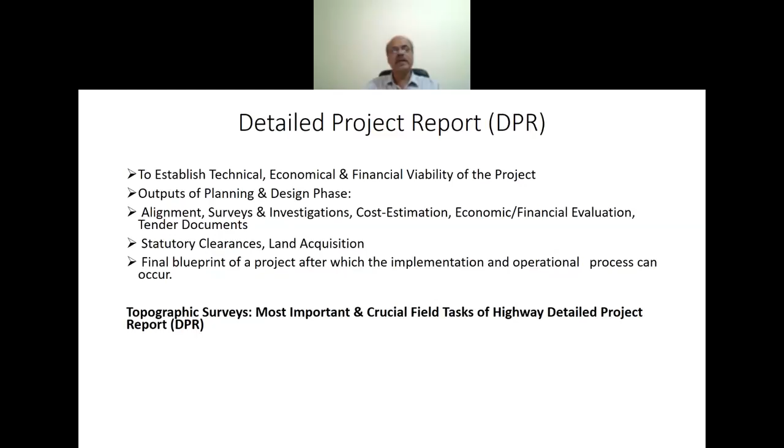So it is the initiation. The detailed project is the detailed planning and design process. Correct.

So if we start with the parts of the survey, there's the reconnaissance survey. Hope everybody knows reconnaissance survey. Can anybody tell me what is reconnaissance survey? Already opened the slide. So reconnaissance survey is the first hand established means - going to the site, visiting the site, and working out based on visual observation and based on the study of maps.

Can I ask people how many have already been involved in the detailed project report? Anybody, whether everybody has experience, so then accordingly I will outline my presentation. Everybody has experience in topographical survey? Hello? Please be interactive.

So can you tell, has anybody done the reconnaissance survey as a part of any road project we were involved in? Yes sir, I did.

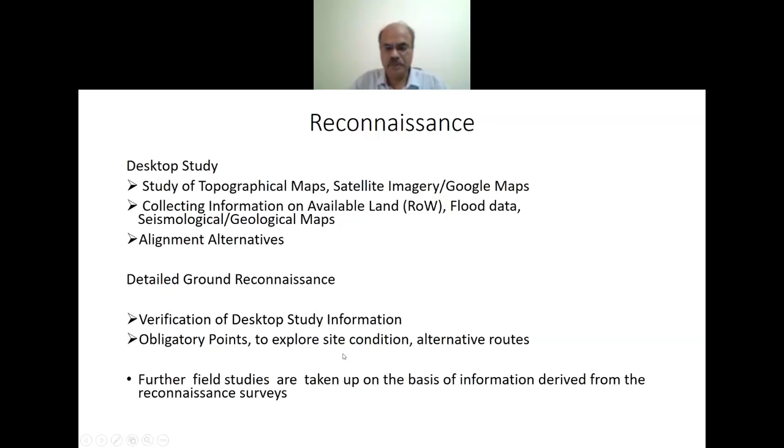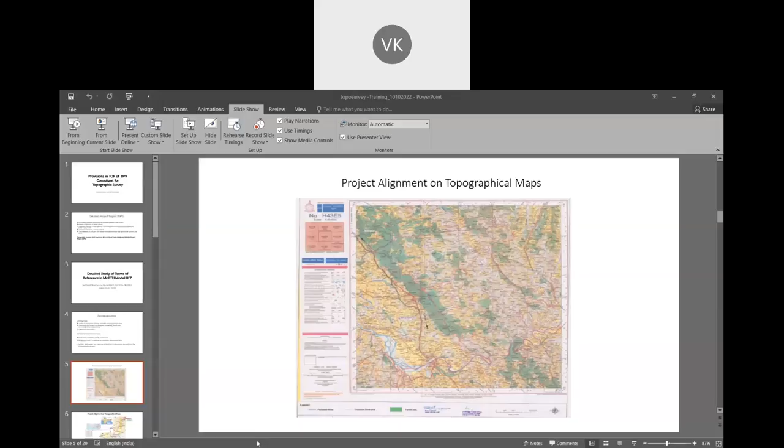Anybody, hello. I request the participants to please mute, and only unmute if you have any query or question on the presentation, or something to share, then please unmute and discuss with me.

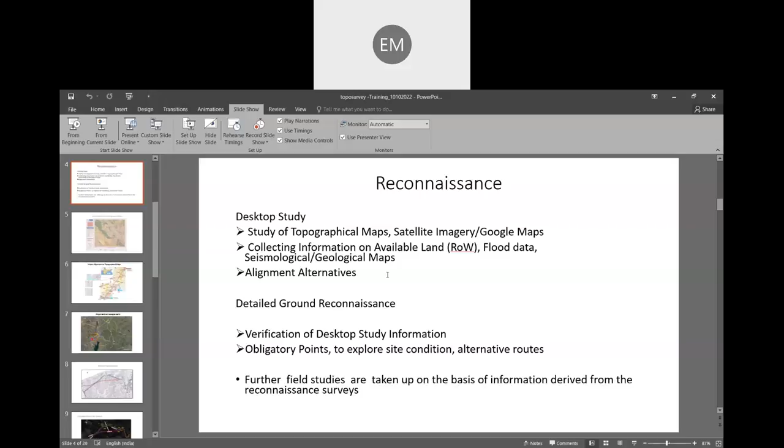Mostly we use it for building structures, isn't it - 100 meters to 200 meters per day in hilly terrain. Mostly in hilly terrain, sir, because of the terrain. But in case of a building structure, a small pocket where we construct a hospital building like this, in that case total station is very useful.

It's time saving. But the total station - as long as you can see the distance, you can do the survey at one point, because total station requires centering and placement. You're right, sir - shifting of total station again needs time.

So depending upon the topography and topographical features, if there are many buildings you can do it, in urban areas it takes more time than rural areas where visibility is not clear for long distances. In rural areas with vegetation and number of trees, it's not possible, sir - mostly in hilly areas.

Now with total station, ultimately our basics of topographical survey remain the same. When we are working on roads, it is an open traverse system. And then when you are on the field, there are errors involved, so any survey method has to be closed traverse survey - you have to close it with the traverse.

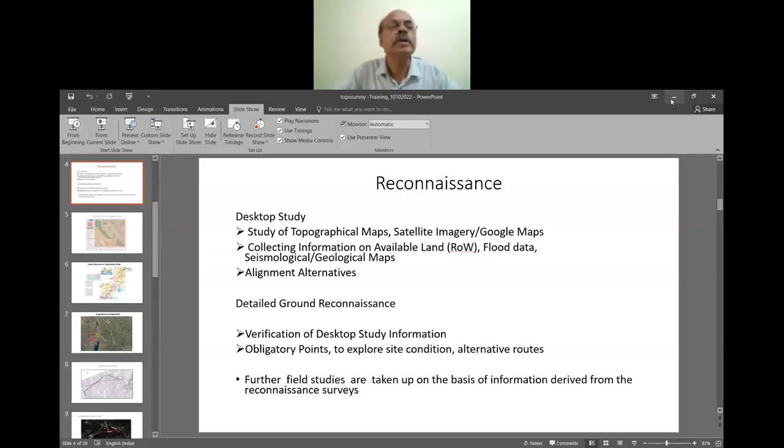You see this - during the initial part of ground survey, we use LIDAR which gives an aerial picture. This is from the aerial LIDAR. LIDAR can also be done using 2-3 types of methods.

One is the photo aerial based LIDAR, drone based LIDAR. Then for rehabilitation surveys, we use vehicle mounted LIDAR. And sometimes a person can even carry it on his back and walk along to do the survey.

Most LIDAR devices are fixed on a vehicle, the vehicle moves at a particular constant speed, and the LIDAR scans all objects that come in front of it. Correct. So LIDAR collects too much data.

It requires a lot of office effort for filtering the data. LIDAR collects a huge amount of data - per square meter there are many points, and through different software or techniques you have to filter it out. Getting the correct level from LIDAR is very difficult.

Yes, please. Yes sir, you are right.

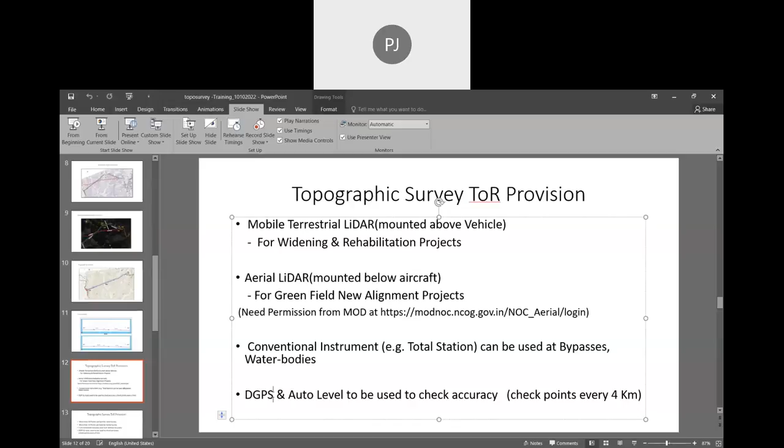When you plan to construct a tunnel through hills, the hill level goes up and down, and you're guided by tunnel slope, which should not be more than 3%. So from DGPS you can fix horizontal accuracy for both ends of the tunnel. For planning the tunnel, how do you proceed with both ends?

We've done it in Himachal Pradesh.

From GPS we establish points at both ends of the tunnel, and between them the ground survey on top of the tunnel is required. Along the alignment we determine the level. Based on that, we establish whether the tunnel is possible and what could be the length. Establishing the tunnel length and topographical accuracy using DGPS and total stations is very important.

But for tunnel survey, you cannot do total station survey all along entirely - you only do the leveling, because you are not constructing a road on top. You don't need detailed topography, but whatever tunnel alignment you have planned, you want to do the level survey.

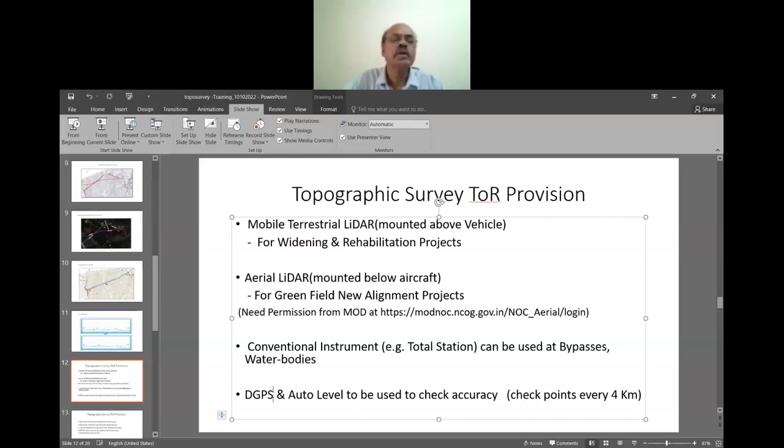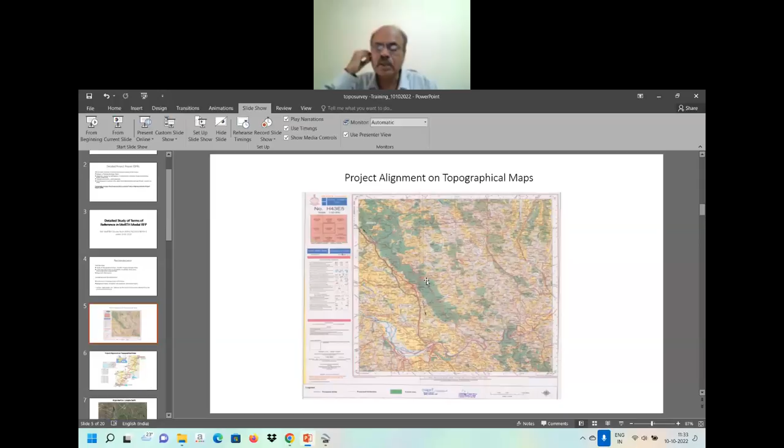This is a presentation of the topographical survey. First is the desktop study, meaning all the process - we procured this data, then drew an alignment, carried out the detailed project ground survey, first aligned it on Google Earth, then carried out ground survey using total station and GPS, transferred it, and then got all the statutory clearances done. The project is under execution at the moment.

So you can see, I'll zoom it, my screen is visible now. These are the coordinates where the alignment is passing through, shown on Google. The whole alignment is transferred. You can see this is a 110-kilometer road project.

If you are aware of Gujarat, there is a town called Bhavnagar. This road is going towards Bhavnagar from Ahmedabad. This is Ahmedabad, and this is the Ahmedabad Ring Road. There is a greenfield town being developed called Dholera - this is the hub, a multi-modal hub as part of a logistic hub being developed here.

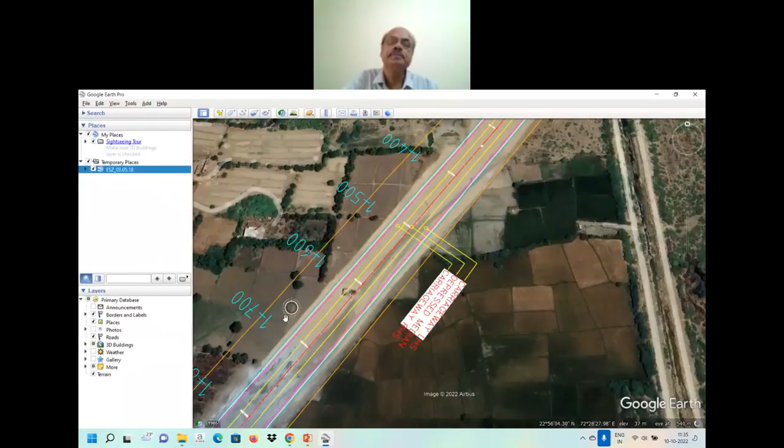Normally the project corridor ROW is here. And then on one side, we kept a reserve for a railway, because the railway track is also to be laid. Generally along the ROW, about 100 meters is surveyed, but at the location of interchanges, it's different.

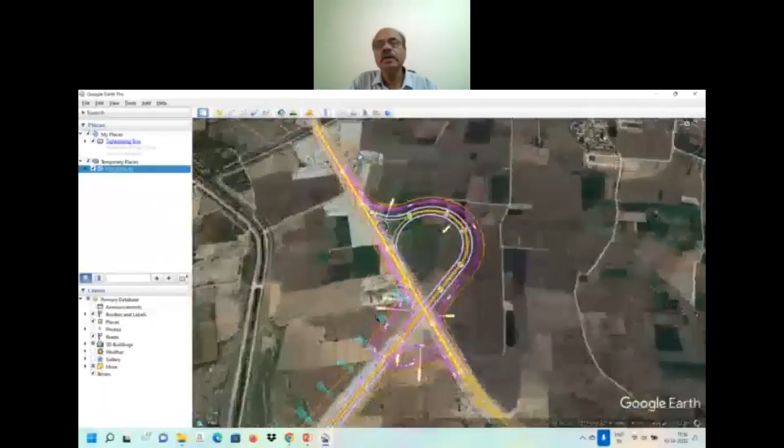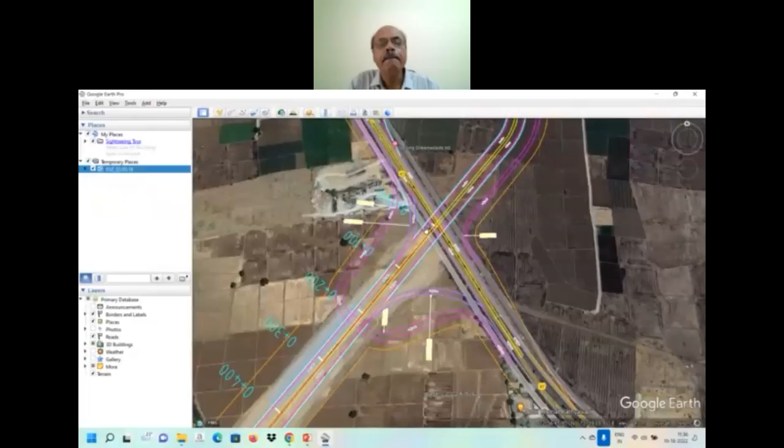Suppose here, you see this is the trumpet interchange. So here the survey corridor is extra. You see the direction of travel - all this area has to be surveyed additionally. You can see the changes marked here.

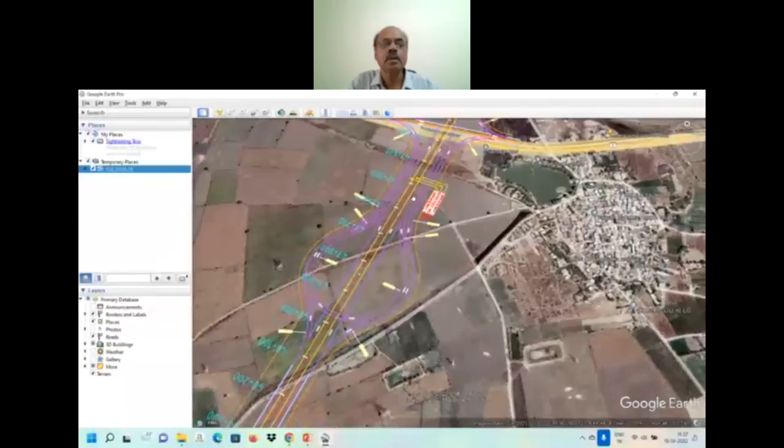Again, you see normal ROW is here, but at the interchange location, there is a crossing - another road is crossing, so there is an interchange here. We call it a dumbbell interchange. Can you see this dumbbell interchange? Is it clearly visible, participants?

This interchange is a cloverleaf interchange. You can see the survey corridor - normal corridor is only 100 meters here, but this is for the rest area location, additional. Here the radius is also shown, and the radius of curve here is 130 meters.

So about 300 meters, 500 meters area is to be surveyed on both sides of this crossroad. This is a fully access-controlled interchange. This interchange is here because a new airport is coming up.

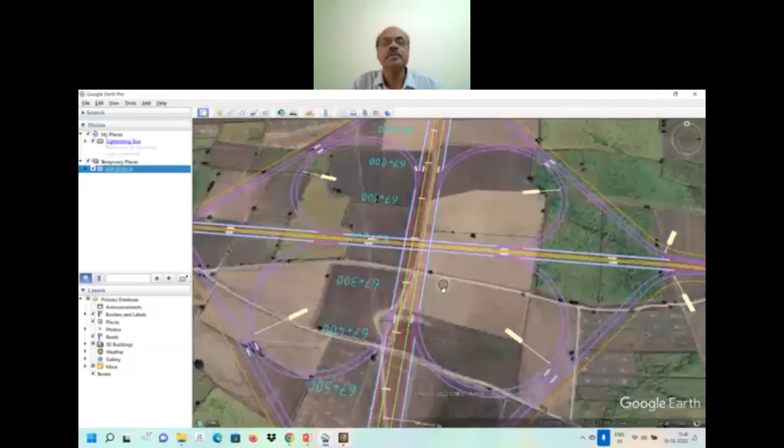So can you tell us this interchange type? What is the ground extent to be surveyed here? Normally when you go, you keep in mind only the ROW, the 60 meter, but here for an interchange or any crossroad where an elaborate interchange is required, much more survey is required. I'm showing you this just to make you understand how much land survey is required in case of an interchange. This road is also a national or state highway standard because it's going to an airport here. A new airport is coming here. So, cloverleaf interchange, you understand?

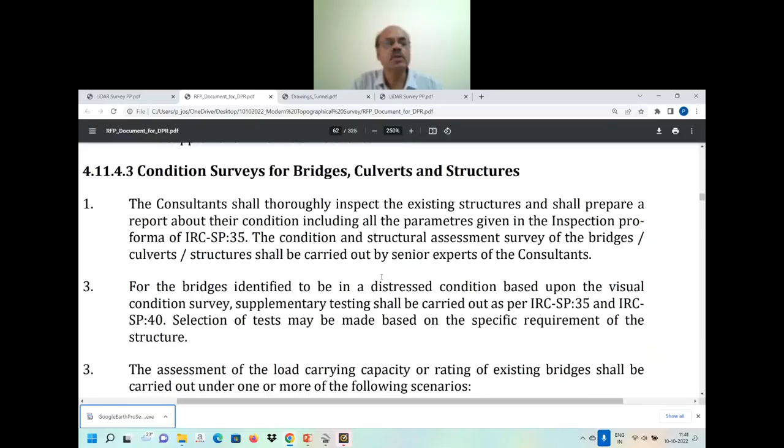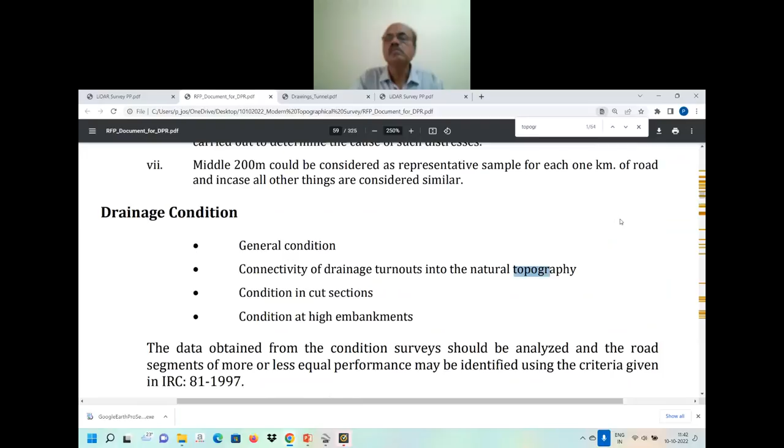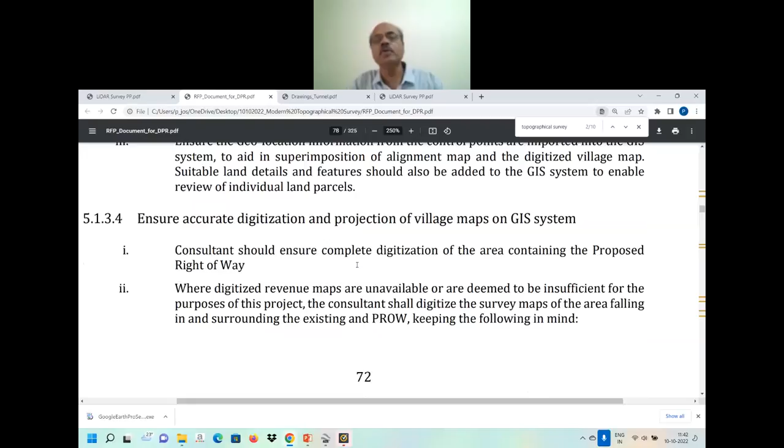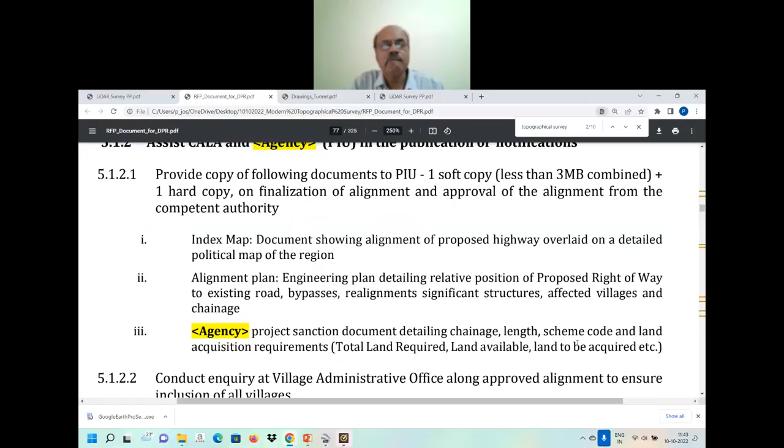You see, now what is the output of the topographical survey? This is on the GIS system, so this is the representation and accurate digitized projection of the survey on the topographical survey. As a part of this, what your DPR has to do is assist CALA. CALA, you know, is the competent agency for land acquisition. So topographical survey details should cover all the details.

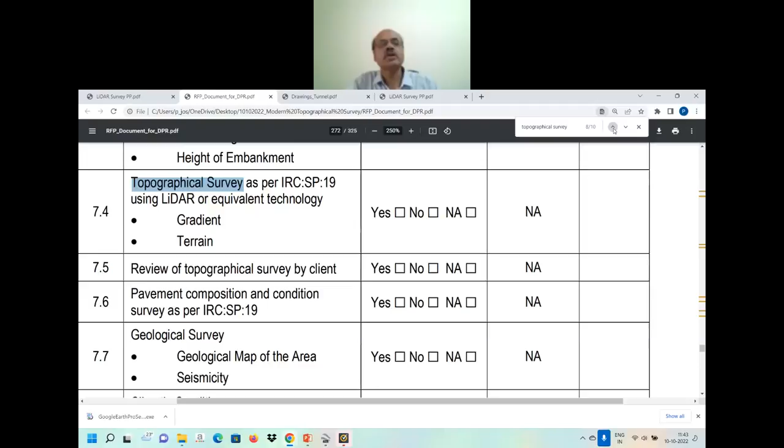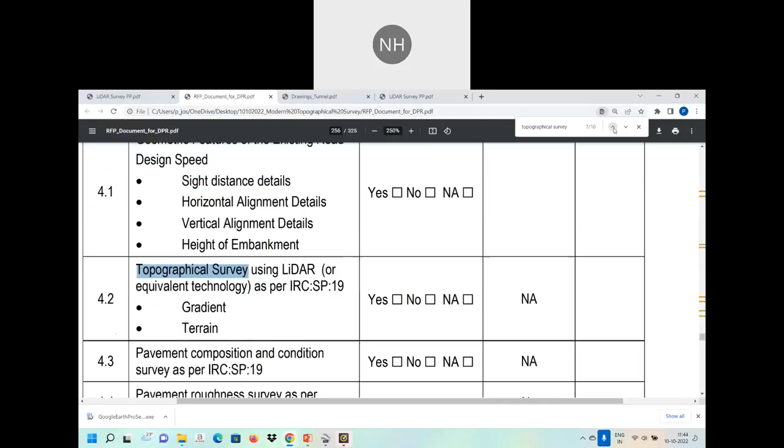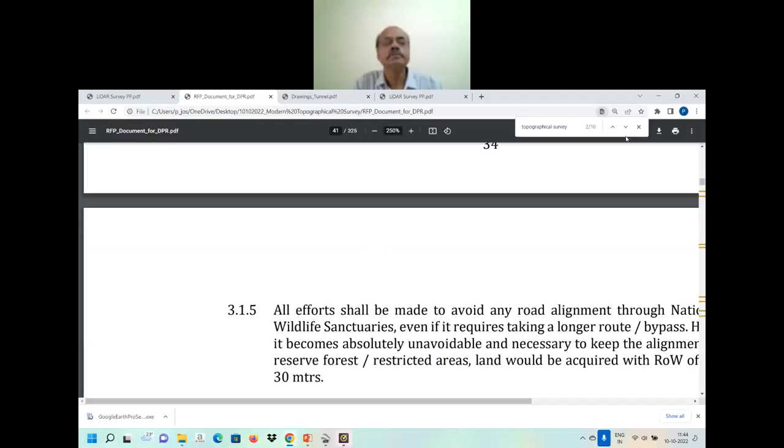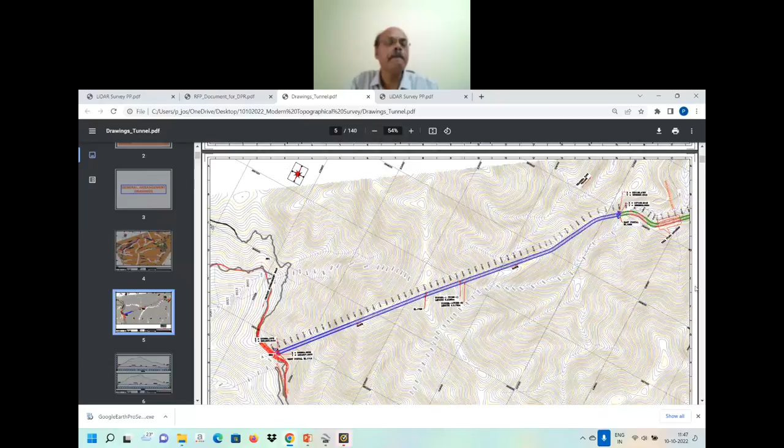Along with this alignment, we did the final detail survey. So this is the profile already shown to you. There are two tunnels along this alignment. One is here and another is, sorry, yeah, this one.

Now this is the NHAI project tunnel study in J&K. So the study, meaning topographical survey, should get sufficient details so that this can be done. All these details can be worked out. The borehole location also has to be provided by the topographical surveyor.

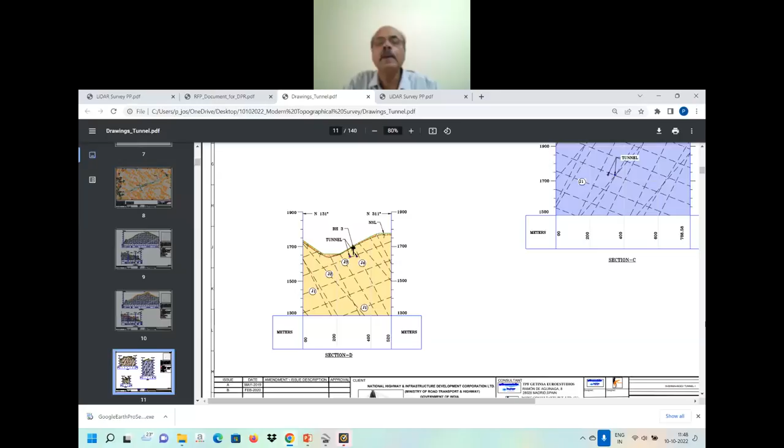You see, all these are plotted on this. Then the tunnel cross section is worked out. You see, these are twin tunnels. Here, for road construction in cut and cover, this is the ground level and the tunnel is constructed this way by cutting all this area.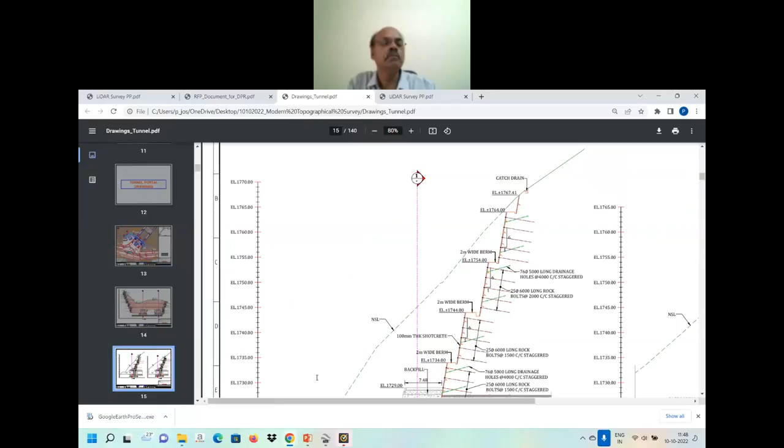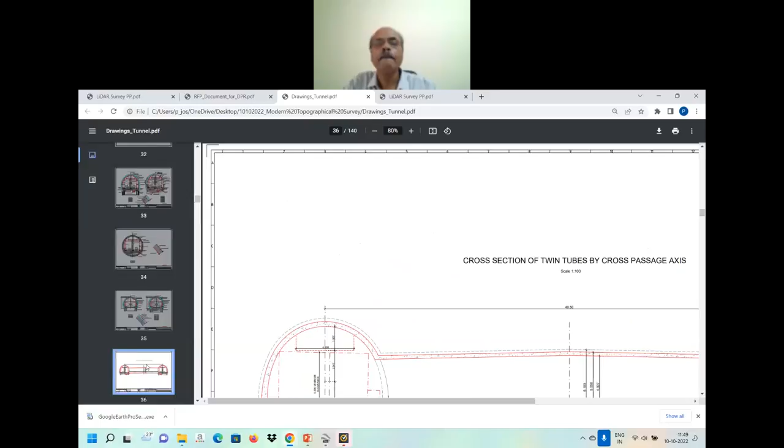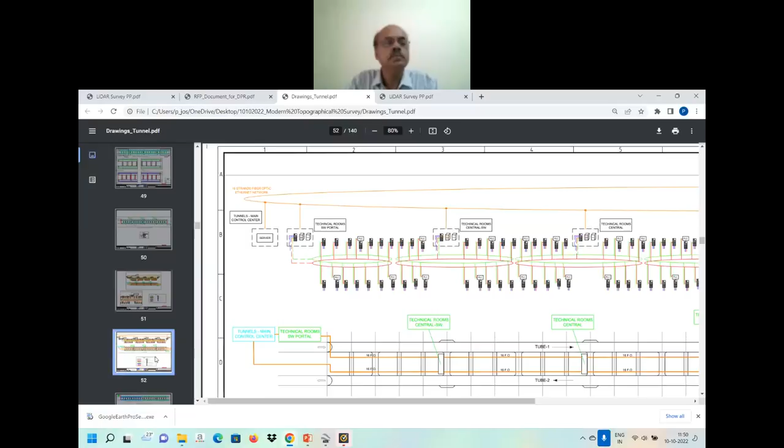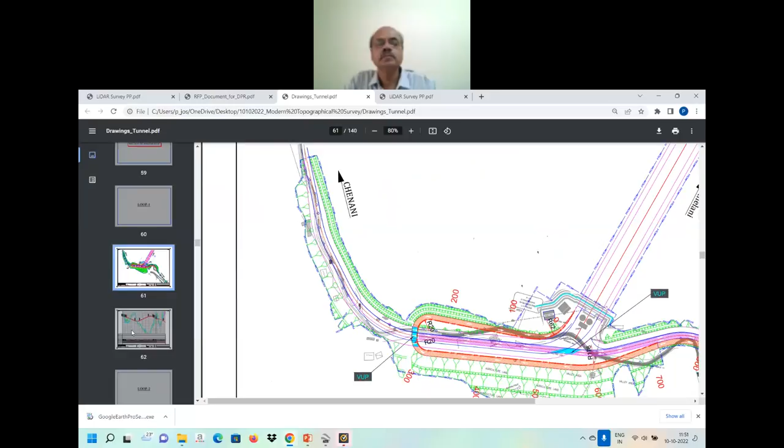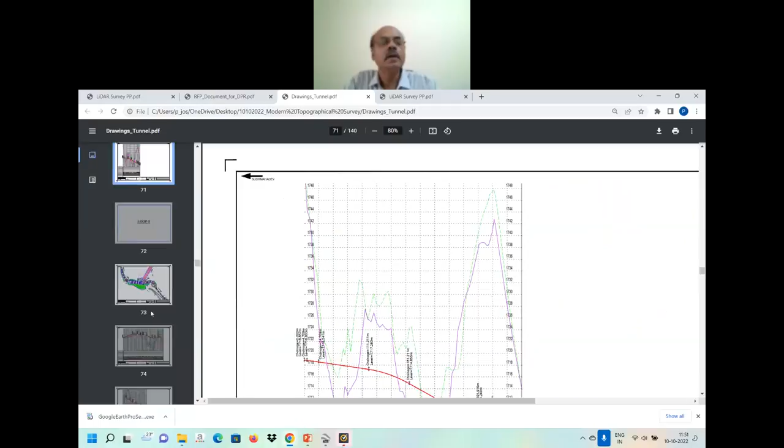This is the profile of the road. Another loop. Anybody from J&K among the participants? You can see what this profile contains.

What are all the features the profile should contain? This is as per IRC SP 99: proposed level, existing ground level at center line, then ground level at 10 meter left side or right side, vertical alignment.

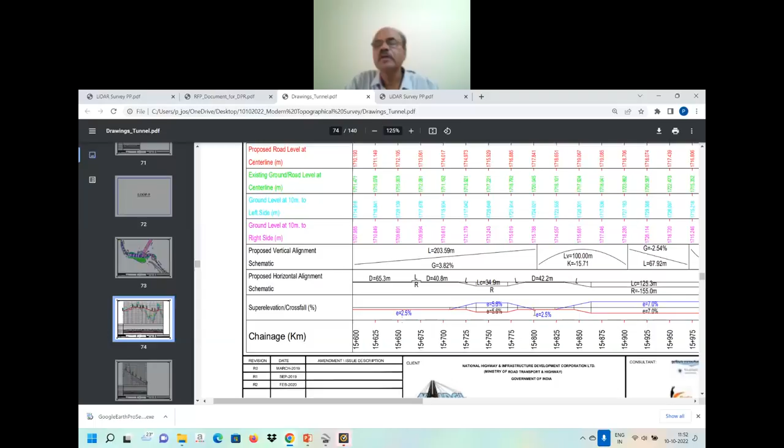Schematic super elevation, crossfall, and these changes. Super elevation is particularly critical, very difficult to avoid in hilly terrain because continuous curves are there. Transition curves sometimes may not be possible to provide. So just like here, at least you get some transition stage, otherwise you have to just cross it. Super elevation ultimately overlaps, so in that case you have to judiciously design based on engineering judgment.

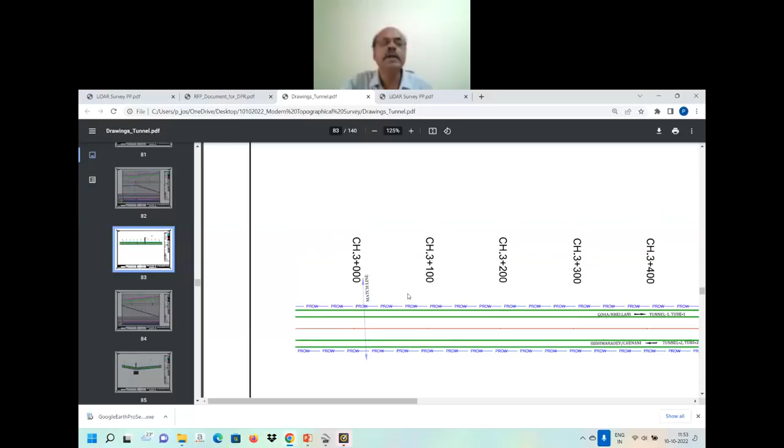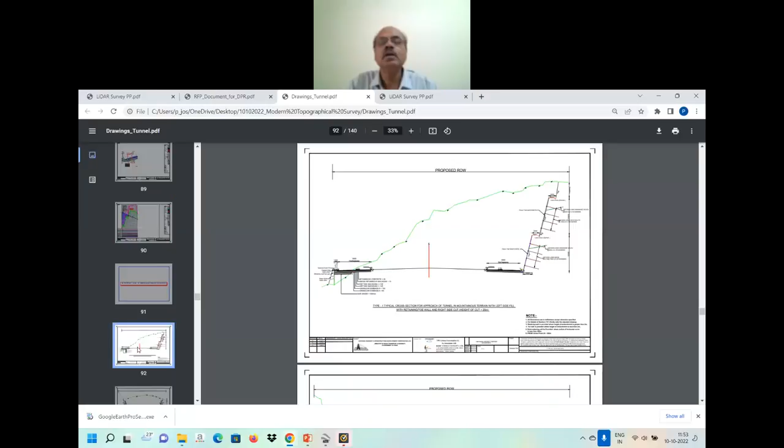See, road coming from here, then this is one tunnel, this is another tunnel, and then this four-lane road. So I've got two case studies: one for this hilly terrain in J&K, and a plain terrain expressway project in Gujarat, plain and rolling terrain. Where in hilly terrain there is a tunnel, and in the plain terrain we mainly have complicated types of different interchanges. These are access controlled, fully access controlled. This is the road cross section. How much height is to be cut?

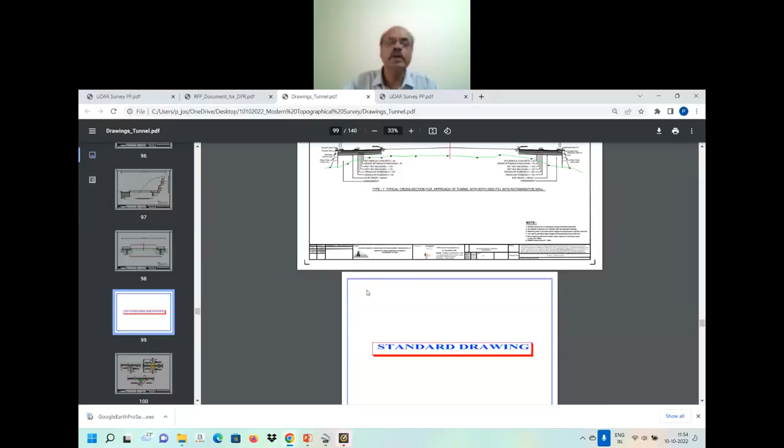The standard drawings has nothing to do with it. The standard, I think, is not relevant.

So this is the complete set of drawings for the DPR drawing for the project.

I will come back to the LIDAR survey and then go to the next. So how is the LIDAR survey done? Just for exposure, you will get detail in the next presentations.

Sir, I have a small doubt. In the previous slide, it is shown that there are some points per square kilometer. Is it a particular code, or just based on the terrain we decide?

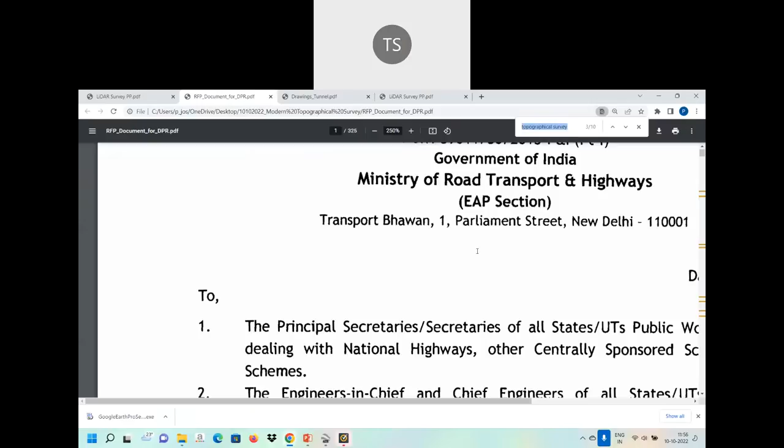Yes, I guess it's there in the TOR. When we give the TOR to the consultant, it is there in the senior consultant's TOR. Okay, we need to know whether they have done any elaborate survey or not. So is there any code that specifies so many points should be explored?

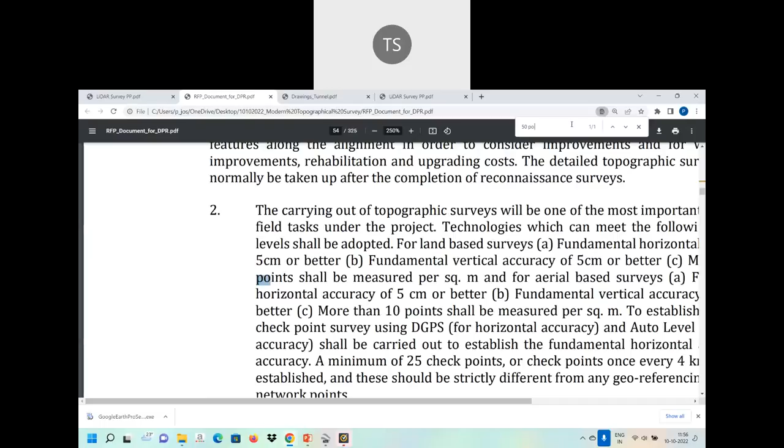Okay, but sometimes what happens is one is the number of points, and another thing is the accuracy also. Because the number of points - these points can be anything. So the points are not enough; ultimately these points should be relevant points.

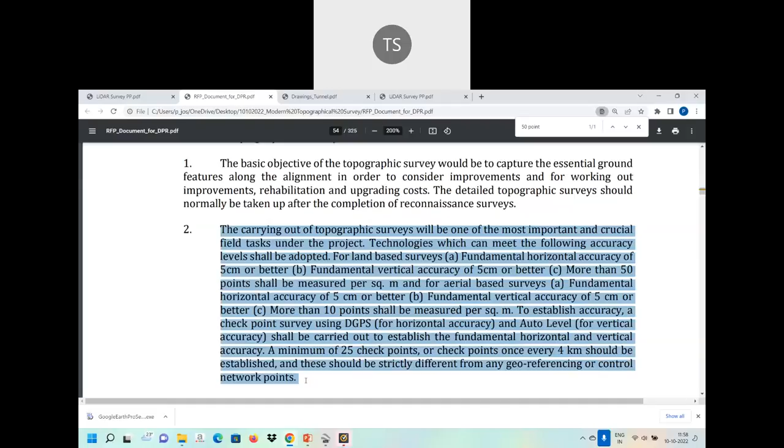Yes, so along with the points, the accuracy is also defined here - the fundamental vertical accuracy, fundamental horizontal accuracy. While giving the scope of work or TOR to the DPR consultant, we need to mention this clause and this code - either it should be more than this, but should not be less than this. Along with the points, you have to specify the accuracy also, so that these are the relevant points, because it is very well defined here.

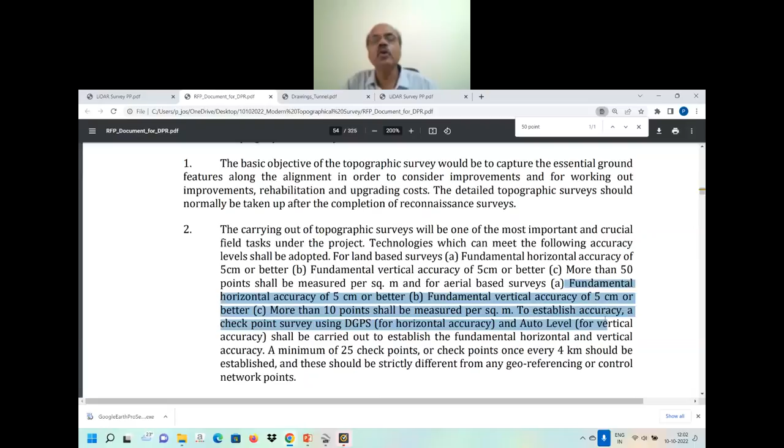But in my view, the lidar survey is presently limited up to the feasibility study, because with lidar we are presently not able to get this kind of accuracy. But lidar is very fast. So what we do is a combination - we do lidar survey and parallelly ground survey. Total station survey can be done only in a single alignment, because lidar can survey a fairly large area.

From aerial lidar, a very large area can be surveyed, and it can collect data beyond what ground survey can do - a lot of large area can be surveyed from lidar. But ground survey takes very large time and resources for carrying out that kind of coverage. So total station survey is done limited to the ROW or the construction area.

We call it the corridor of impact. So within the area where construction happens, on actual ground, total station gives very accurate results. This accuracy of total station, compared to lidar, is much better - total station and auto level based survey give better accuracy.

So presently, for feasibility study, lidar helps in quick survey and getting the alternatives analyzed, establishing the economic viability of a single alignment.

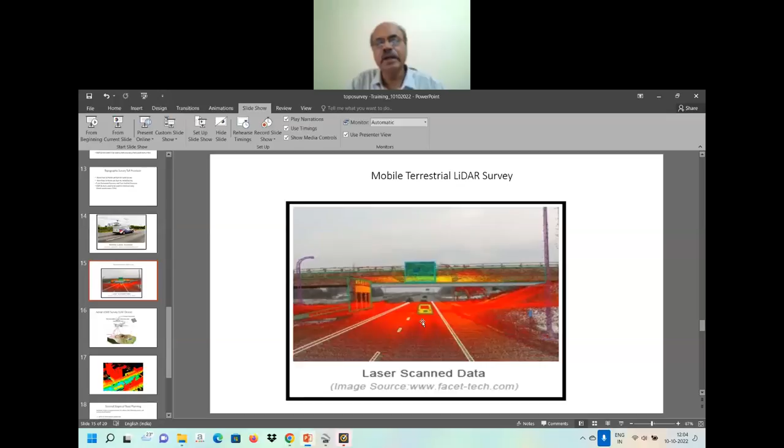Particularly in greenfield projects, drone-based lidar is very helpful because sometimes you cannot physically go to that area, so you can find out exactly where the alignment should go, and then carry out ground survey for detailed work, cross section, quantity as per TOR.

So the TOR defines cross section and other details. The topographical scale should be 1:1000 scale, for adjoining areas of interest also like river crossings, with a contour map at 50 centimeter, 0.5 meter interval. This 0.5 meter interval is good enough normally to get fairly accurate quantities.

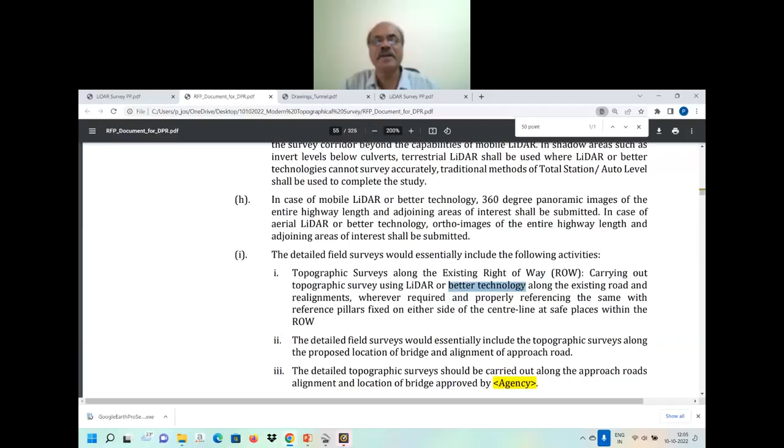Ultimately lidar cannot always be relied upon fully - wherever possible, lidar or better technology is used. But for construction accuracy, total station survey is better at present.

Then all building structures - these are all data points. This is very important because ultimately you have to pay compensation for land, buildings, or utility services acquired. So collection and extraction of details for all features such as structures, bridges, culverts, utilities, existing road, electric and telephone installations, both overhead as well as underground, huts, buildings, fencing, trees - because underground features cannot be calculated by topographical survey alone.

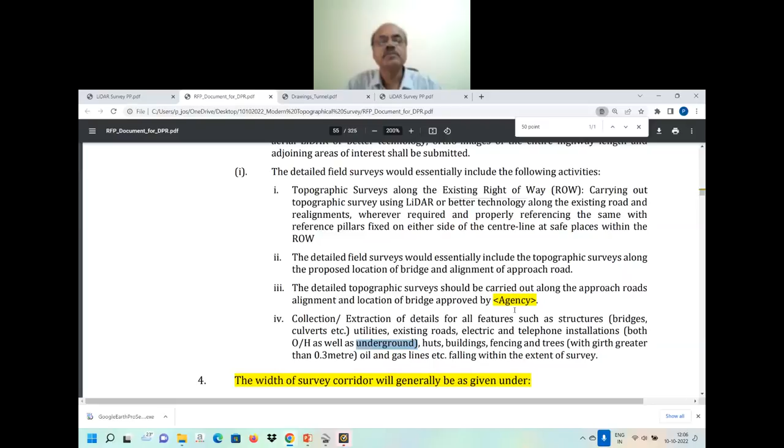For underground features, we use other methods like GPR, or we get information from the respective department. But all the overground features can be collected using the topographical survey.

Now the width of corridor, the TOR should also define the width of corridor. So it is given here. The width of survey corridor is taken into account the layout of the existing alignment, including the extent of embankment and cut slope. This is for existing rehabilitation project, that is right, left, symmetrical.

It should cover sufficient width beyond the center line of the proposed divided carriageway. Normally, the survey should extend a minimum of 30 meters beyond either side of the center line of the proposed carriageway or land boundary, whichever is more.

So this 30 meter is for a general national highway. But for expressway, because we go for a very large median, 15-20 meter median nowadays, there we go for 120-meter survey, something like double of 60 meter on either side. Here the corridor is 30 meter on either side, meaning 60 meter corridor. But in expressway, go for as large as 150 meter corridor.

Now this is bypasses. In case reconnaissance survey reveals the need for bypasses at congested locations, the traverse line would be run along the possible alignment in order to identify the most suitable alignment for the bypass. Because for bypasses, the alignment is not known. For existing roads, the alignment is known.

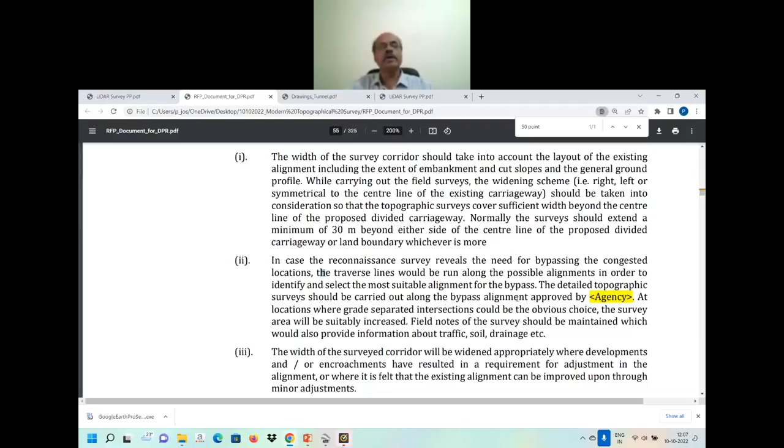So here you have to first run the traverse line. After getting the traverse line, you have to establish curves of desired standard as per codal provision, and then again do the detailed survey done along with the curved alignment.

Then the width of survey corridor will be widened appropriately where development or improvement or adjustment of the alignment is required, just like where alignment improvement is required or alignment has to be shifted at some locations for certain obligatory points. Now where existing road crosses the line, the survey will extend up to 100 meter either side of the road center line.

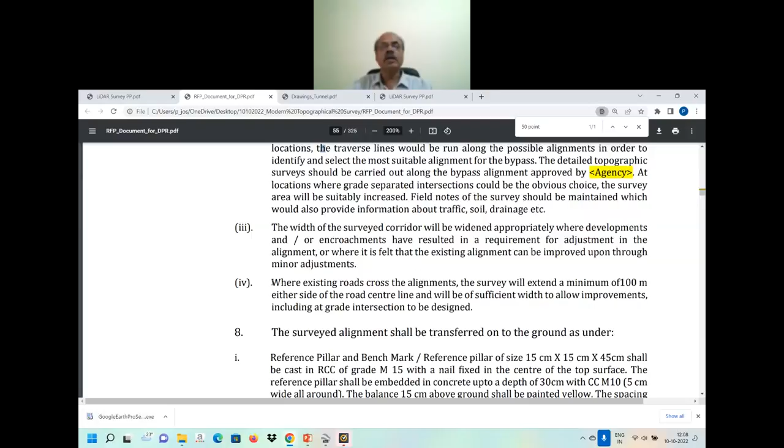It is for junction design. For interchange design, as I showed you, normally it is 100 meter for at-grade junction. But in case of interchange, it goes to as high as 500 meter. This is for interchange, a fully access controlled cloverleaf interchange, so here it has gone to 500 meter.

Meaning the topographical survey has to be presented to many agencies, not only to the construction contractor but forest department, utility, water supply, or others, because depending upon their requirement, the design alignment is to be presented to them. And then once the clearance is got, because construction can be started only after getting the clearances, otherwise the alignment may have to be shifted also.

So the topographical survey should consider all this, and the TOR should take care of all this. So sufficient area needs to be surveyed, so that in future you don't have to send the team again. Once the survey is completed and design is done, and then for some reason you have to change it, then it gets delayed.

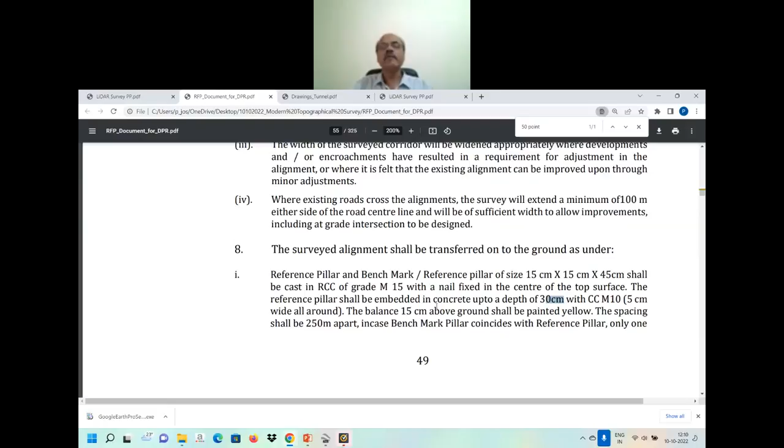So the size is 15 into 45. And then the reference pillar shall be embedded in the concrete up to a depth of 30. So out of 45 centimeter depth, 30 centimeter is embedded and 15 centimeter is above ground, and it should be painted yellow.

So establishing benchmark at site, and then this GTS coordinate should be connected to the GTS benchmark, this is the Survey of India benchmark, and it should be placed every 250 meter, and it should mention its level and BM number, because this is most important.

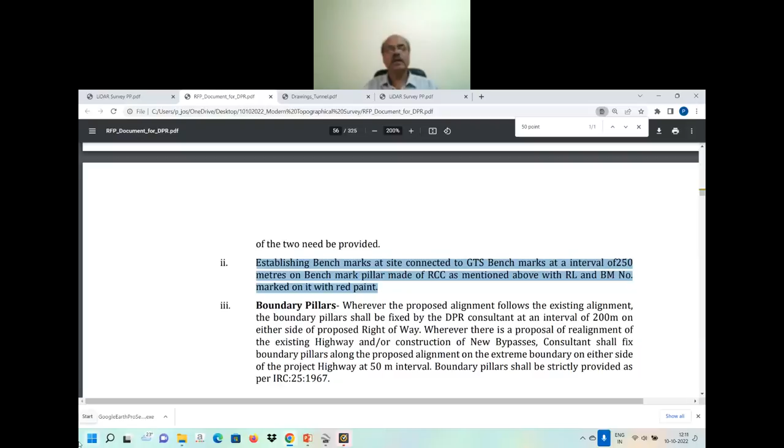Sometimes, you know, if the construction goes after say 1 or 2 years after the DPR is approved, then if you don't have this benchmark at site, it is difficult to establish or mark the center line. Again you have to re-establish that, or you have to redo the survey.

Now boundary pillar is just for fixing the boundary, so that whatever ROW is acquired, wherever the proposed alignment follows the existing alignment, the boundary pillar shall be fixed by the DPR consultant at an interval of 200 meter on either side of the proposed right of way. So that this is the boundary within which the highway will be constructed.

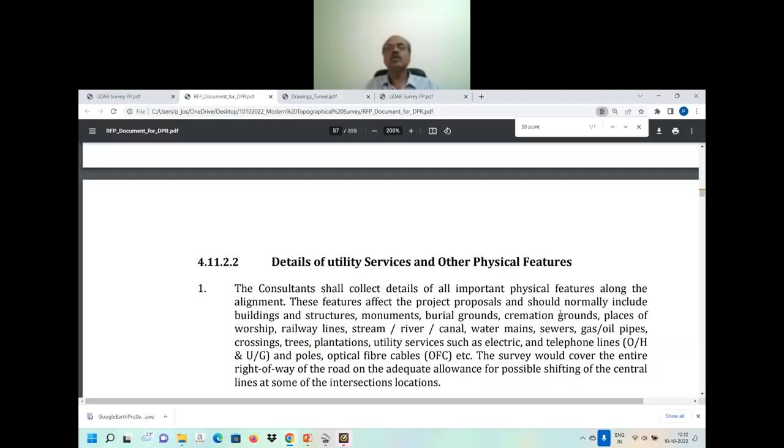This longitudinal section is a part of DPR, not a topographical survey. Now, utility and physical features - the topographical survey should show this also, because it's part of the topographical survey. The consultant shall collect details of all important physical features along the alignment. These features affect the project proposal and should normally include building structures, monuments, burial grounds, cremation grounds, places - this is called topographical details - railway lines, streams, rivers, canals, watermains, sewer, gas, oil pipes, crossing trees, plantation, utility services.

Possible shifting of center line - sometimes if curve improvement is required, then some extra survey is needed. Since this is not known initially, it's mentioned in a vague manner that the topographical survey should cover adequate allowance for possible shifting of the center line at some intersection location. In urban areas, the center line may have to be shifted due to local issues, so during the survey itself, additional detail should be collected on both sides, because it's easier and less costly to collect additional information while doing the survey. So where there is a possibility of the alignment likely shifting, you do some additional survey at such locations.

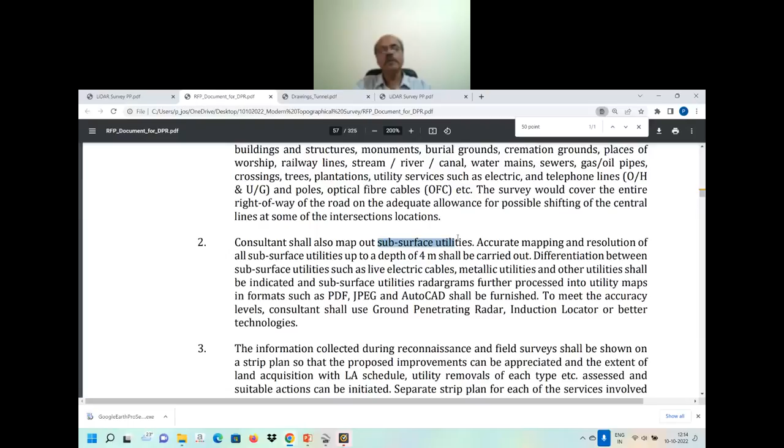Now, subsurface utility - this is only possible if there are pillars available. Normally the topographical survey collects this; if underground gas lines or water lines have pillars, that is collected by the topographical survey, and further detailed information about how the line is going can be obtained from the respective departments.

So this is ultimately the output of the topographical survey. Now, the information collected during reconnaissance and field survey shall be shown in a strip plan, so that the proposed improvement can be appreciated to the extent of land acquisition. With the land acquisition schedule, utility removal of each type can be assessed and suitable action taken. A separate strip plan for each of the services involved shall be prepared for submission to the concerned agency. This is important, because different agencies require different types of information.

That is why, with digital tools now available, it is possible. We can put it in different layers, and for different departments, other layers can be hidden, and only the layers required by that particular agency can be presented to them - services are not required, only the land is required. Then from this data, through GIS, everything can ultimately be put in a GIS map - this geographical information system.

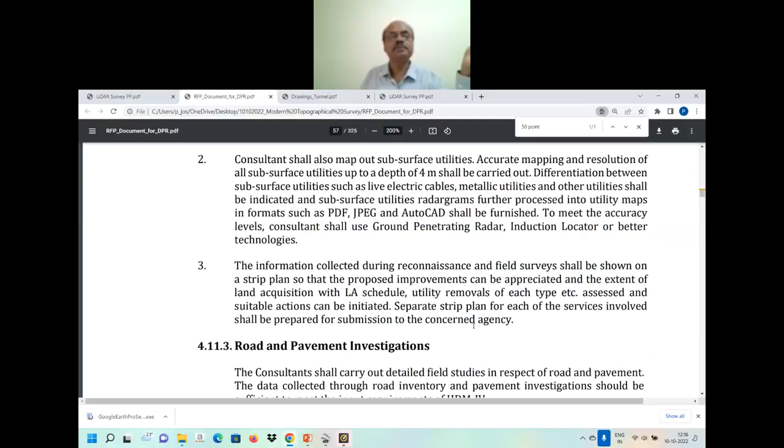So the topographical survey, revenue maps, land owner data, and other data collected - secondary data collected through the hydrological department or through land ownership records - can also be put into the GIS drawings, the topographical survey drawings. So everything is available in one location on your desktop, and required information can be readily obtained. This helps in expediting and increasing the speed of the DPR, enhancing accuracy, and checking verification also, because if you need to verify, you can simply go and find out who is the owner of that particular area.

So the topographical survey, the extent of topographical survey required, is clear now. Is it clear now? Yes sir, yes sir, thank you sir.

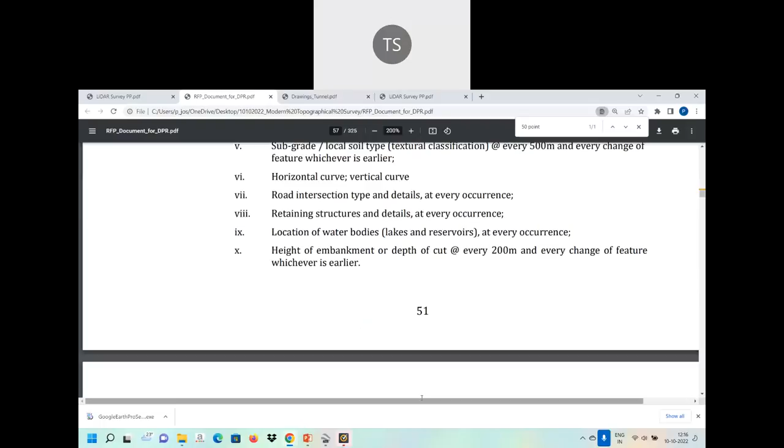You know why we are using LIDAR, total station, auto level, digital level - so many number of instruments. So we can use them judiciously depending upon the type of project. The TOR I showed you, issued by the ministry, is a typical TOR for a typical highway project. But depending on the project - for a small bridge project, you don't need LIDAR.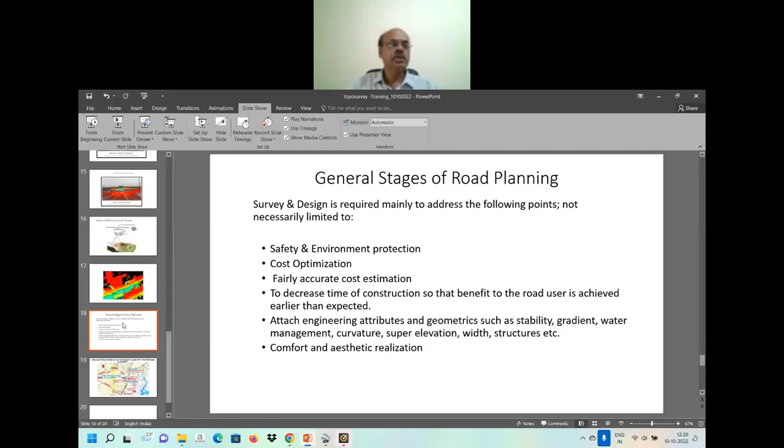For shorter length projects, total station survey or GPS survey is good enough.

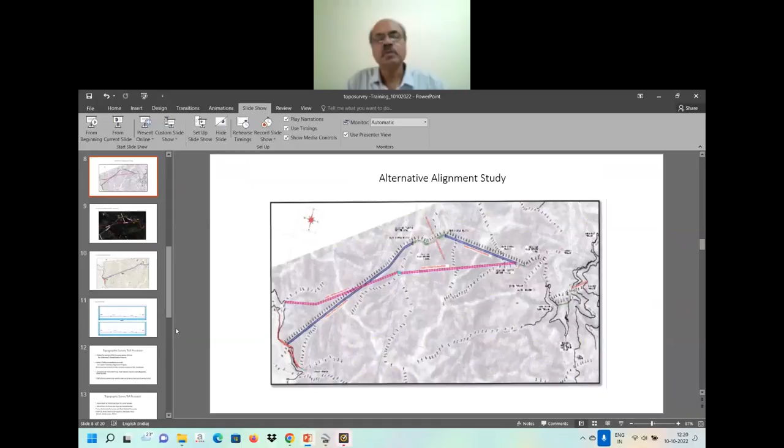So I am done with this. If you have any question, any queries, or if anybody wants to share your experiences on the topographical survey, then we can discuss it, because I will also share my experiences.

I have about 30 years of experience. I've done theodolite survey, and now we are dealing with modern methods. I'm a designer actually, a highway designer, so we have dealt with all kinds of surveys - we have designed roads using plane table survey, which is not used at all nowadays.

So yeah, please, we can discuss any queries or points.

Sir, can you please explain how to do the LIDAR survey - whether it is aerial or through any vehicle, in deep forest areas, sir?

Forest areas, yes. Actually, there is a separate presentation for it, a whole new full lecture. As part of your training program, this being a 1 week training program, you have a full lecture on it.

So I've just touched on it. You see, this is in a forest area on a greenfield - you do it this way. The LIDAR will ultimately capture the green forest areas where too much of trees or thick forest is there.

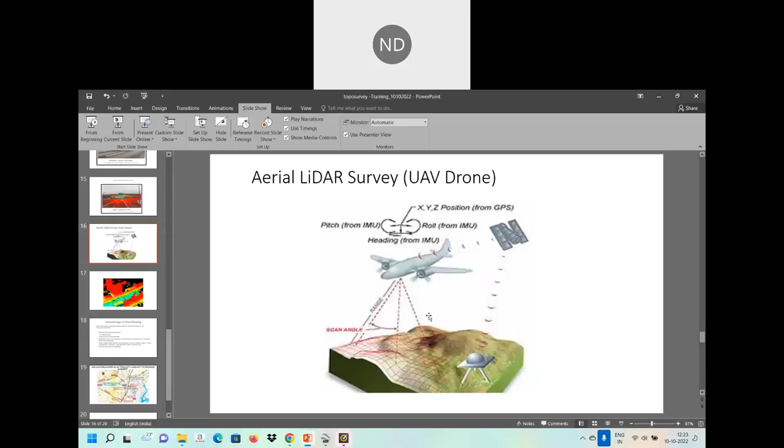So, lidar survey - because total station survey can only be done in daytime, there is time saving in lidar survey. In forest areas, otherwise the lidar survey gives very absurd results if you don't properly filter it or don't have the knowledge. But in the other presentation, you will get all those details - that will be a detailed presentation, it's there in your program.

Okay sir, thank you sir. Yeah, any other questions?

Any other queries on this? Mainly we are discussing here the TOR provisions. Yes, please.

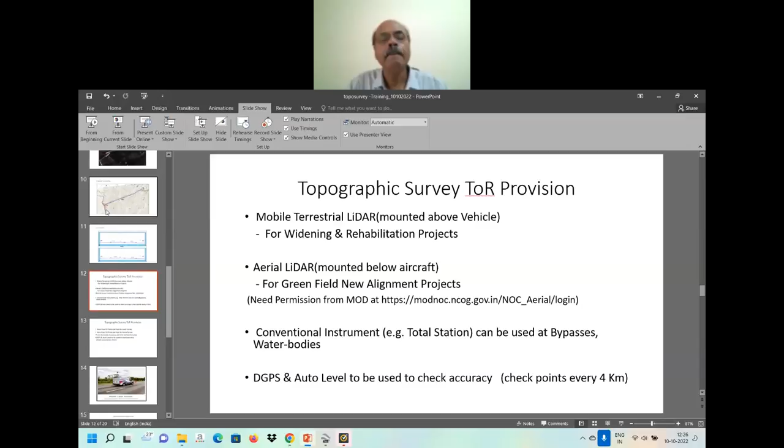You see that whatever data you get, then even the data is there. The DGPS can be used to check the accuracy. Sometimes if you get any doubt...

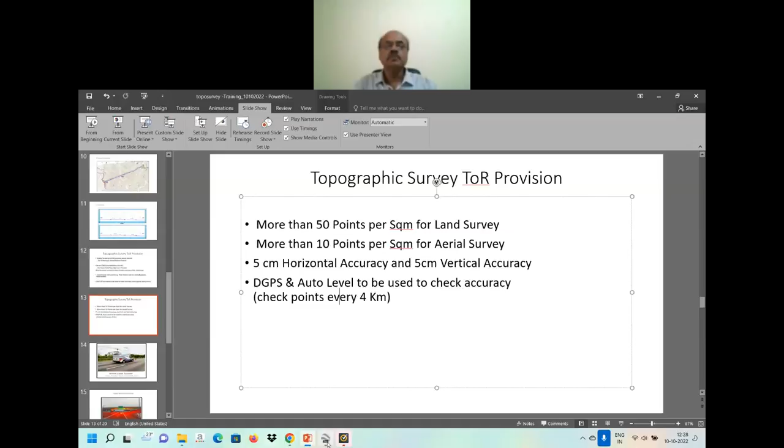If you have any interest, I can explain this recently carried out DPR. This is a 110-kilometer alignment, presently under execution. A greenfield alignment, expressway alignment, with no at-grade intersection.

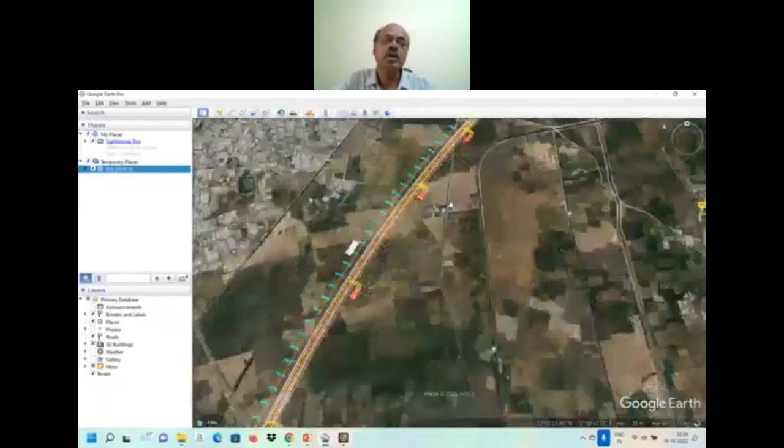At one ROB, an interchange, a dumbbell interchange - you see this is a trumpet interchange. Hope people are aware of it. If you have any queries, I can further explain. There is one interchange in this 110-kilometer alignment.

This is an open toll system. There is a toll plaza also, a ramp plaza and two main toll plazas.

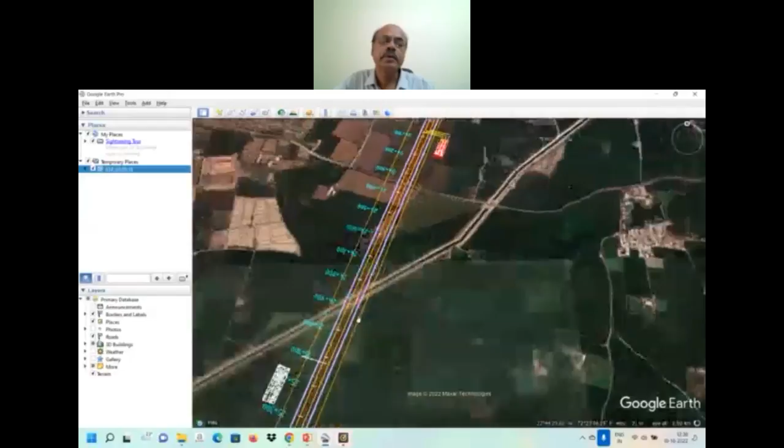Just see, all details are also provided here. The whole alignment is transferred in the GIS. These are the towns, and the alignment goes close to it, crossing the railway line, again the railway line.

Major bridge here is the... So to reduce the cost, normally the bridge alignment should be perpendicular to the crossing, to the extent possible.

Cloverleaf - because it's slightly more than the required ROW. So this saves the land acquisition cost in this kind of interchange, but they are less efficient also.

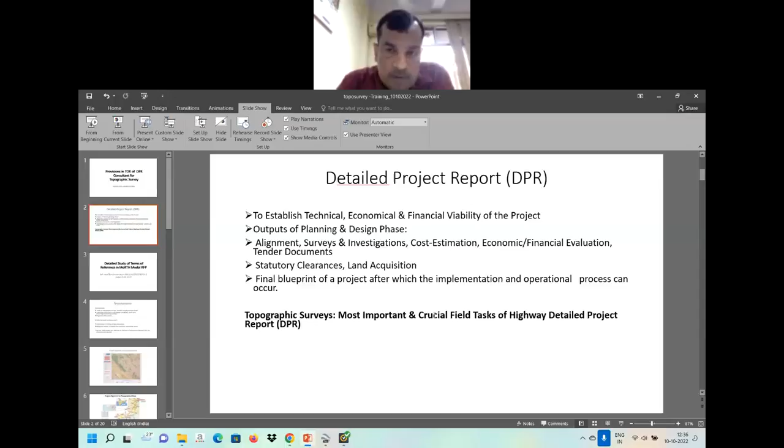Any further queries? I think I'm through with my presentation. So any question? Please feel free. If the participants have any doubt or any questions, please ask questions or clear your doubts. It is once again requested, if the participants have any type of doubt on the subject, please clear your doubts.